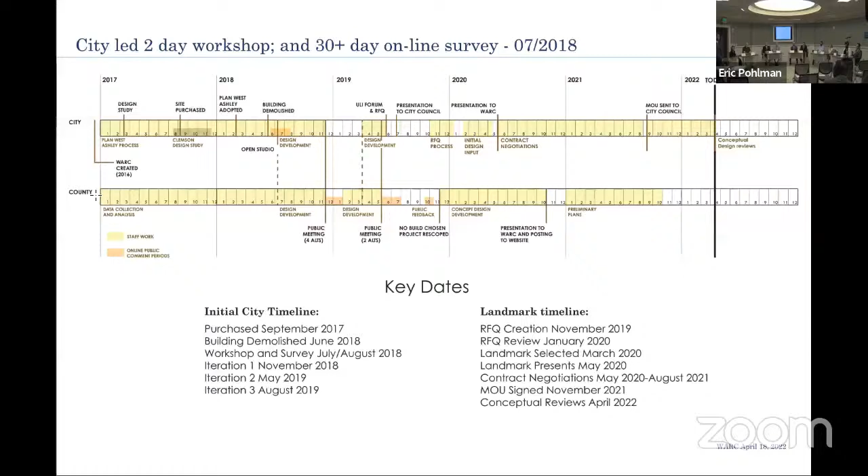As Councilman Shade said, we've been working on this since 2018. This is a timeline I keep of all the efforts we've put into this site—it's getting pretty tiny on the screen now. It's been going on since 2017 when we purchased it, and a lot of what we've been doing is also working with the county on the Sumar Street or Sam Rittenberg Old Town intersection. That was a solid year to year and a half of our work.

Shortly after the city demolished the property, about two months later, we did a very robust online and in-person public information campaign, getting ideas from the general public about what should happen at this location. We also had a two-day workshop where our urban design department sat down with anyone who walked in and drew whatever they thought should go on the site. We had quite a large amount of different design iterations on this parcel.

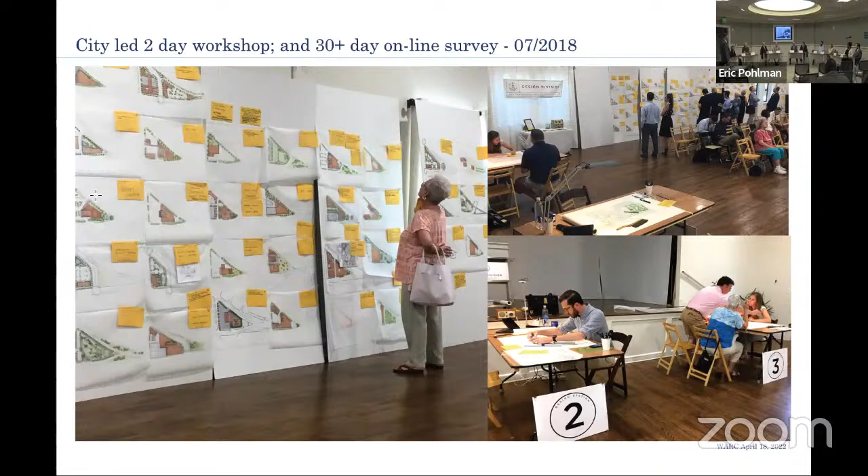In terms of the online survey, we had about 927 respondents over 31 days, 733 of them residents of West Ashley. For the most part, what they wanted was to be able to walk, bike, and take transit in the area—that was the majority of people, at 72% saying that.

They also wanted to see increased landscaping, better landscaping and beautification elements in this area. One of the most important items to them was that the intersection should be improved to allow all modes to travel through there, especially vehicles, to continue traveling through in a very safe and convenient manner.

When we asked what should go there, 61% of respondents said a passive park, 50% said small scale retail, and 49% said restaurant.

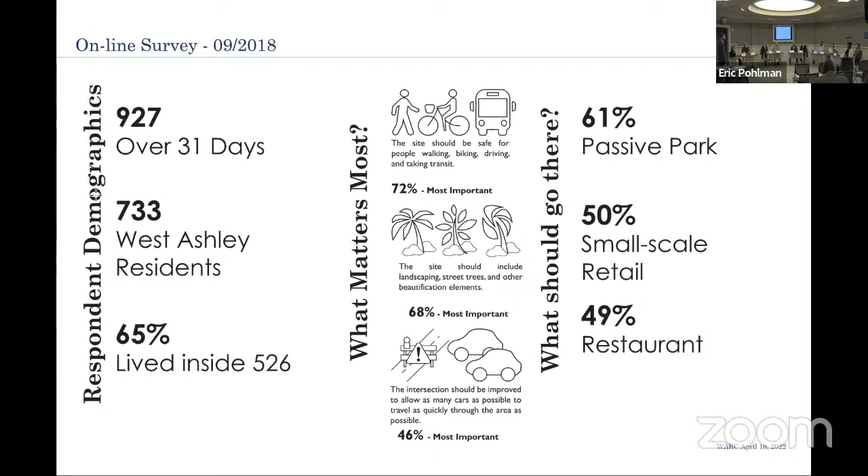We had a lovely fill-in-the-blank question: what is your big idea? A lot of people's big ideas were public green spaces, retail, traffic and transportation improvements, mixed use traditional neighborhood, make it look like the workshop, put green space for families out at this site, make sure it has civic or cultural uses. There was a big push by a group to have a wooden dance floor for dance events or other musical venues for Spoleto. Not very many people said residential, and a few people said it should just be aesthetically pleasing and useful.

So the recurring phrases and words we got from those surveys were: it needs to be safe, beautiful, family friendly, have gardens, parks, green spaces, and be able to host events.

With all that information, the city distilled it down into a conceptual program of having a passive park, small scale retail, restaurant, commercial, and civic cultural space. We worked out some general square footages we thought would be good on site—about 18%, or 18,000 square feet of built space, and 10,000 square feet of open green space.

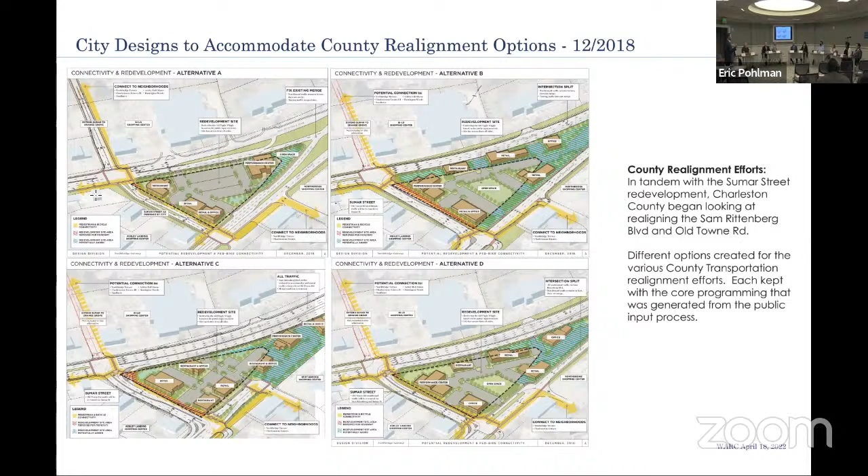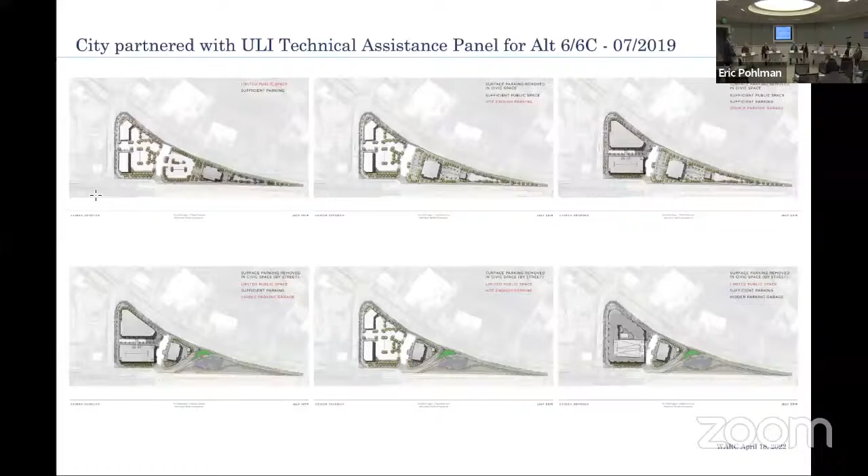With that, we entered in with the county as they were going through their realignment efforts, to show how the program could continually be adapted to what would happen at the intersection. The county started out with, I think, 6 or 7 options, which came down to 4, then to 2. The county opted, instead of trying to realign the roadway, to shift focus to making the intersection improved and safer for all in its current built way—I'll talk about that a few slides later.

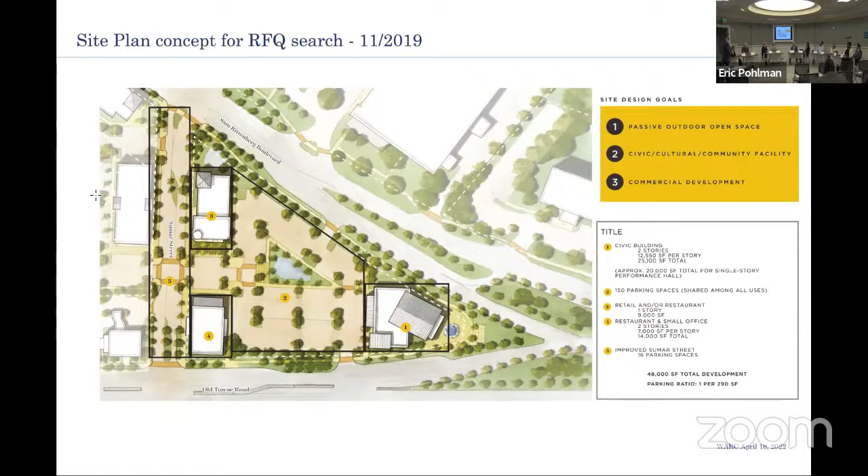After the county opted to go with the no-build for the realignment, the city released an RFQ for the commercial sector to come in and do a partnership with us. This was our imagined site plan for the area, to tease out the commercial sector for what could go here. It shows exactly the program we had wanted: passive park, civic cultural space, and small scale retail and offices, I believe.

And then after the RFQ, that's when Landmark and Liollio came in. They were our development partner that came through the RFQ process. I'm pretty sure they were excited, given the diagram they first submitted to us, by the fact that this area is surrounded by residential and has good, solid commercial uses around it already. So those are two elements they wanted for their private sector development.

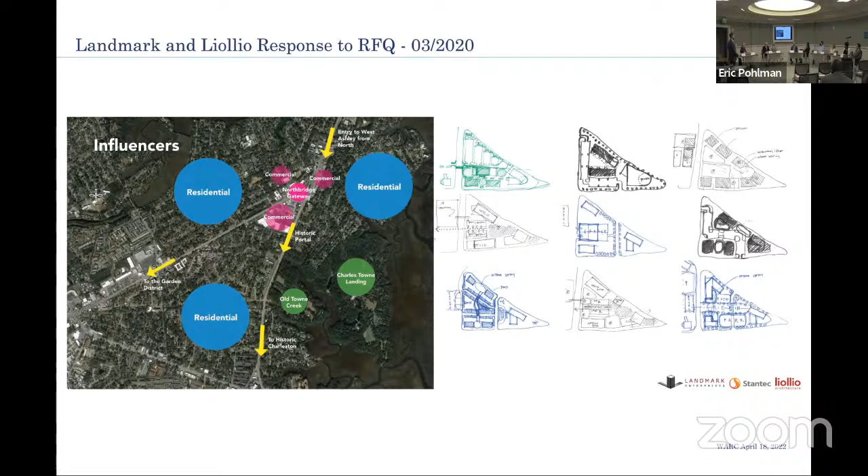In addition to that, there's Charles Towne Landing and the Old Towne Creek County park that's going to be coming in for public investment in the area. They went through and did some design sketches to see what they could fit on the site, and this is what they came back with.

Their proposal was actually to increase past what we thought could go there. They believe we can fit about 60,000 square feet of different use items: 20,000 for the civic function, which would be both the auditorium and offices for the city; 30,000 square feet of office; and 10,000 square feet of retail and restaurant. This was presented to the West Ashley Commission in May of 2020.

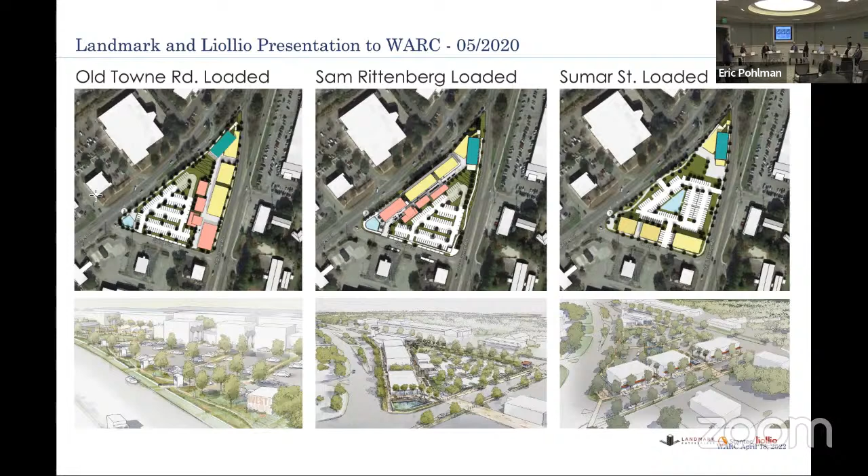We went through several discussions about where the built environment should go on the site, and throughout the hour and a half discussion, we kept coming back to Sam Rittenberg as the preferred option. There was no formal vote taken, but since this was the option most appealing to the commissioners, we felt this is the one our development partner should go with.

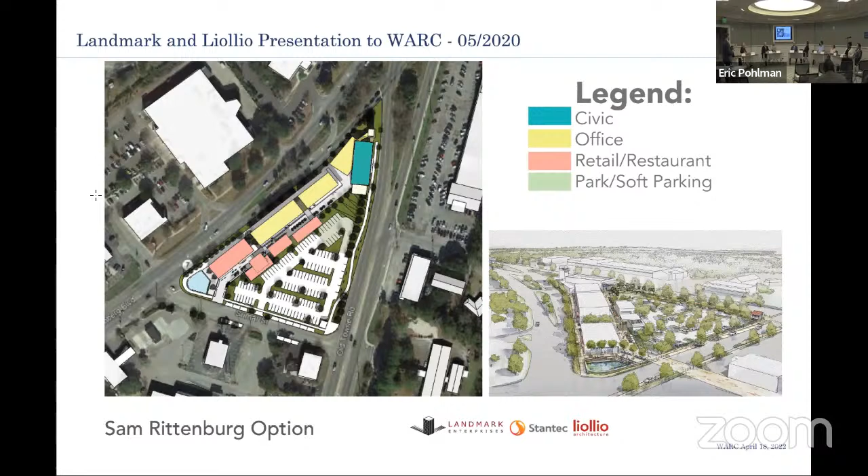Then in August 2020, shortly after that, the county re-released its plan for the Sumar intersection, Old Town Road, Sam Rittenberg area. This time, instead of realigning roads, they're focusing on improving what's already there and making it much more bike and pedestrian friendly, along with doing a lot more traffic calming through plantings along the road and installing some street lights that are needed right now.

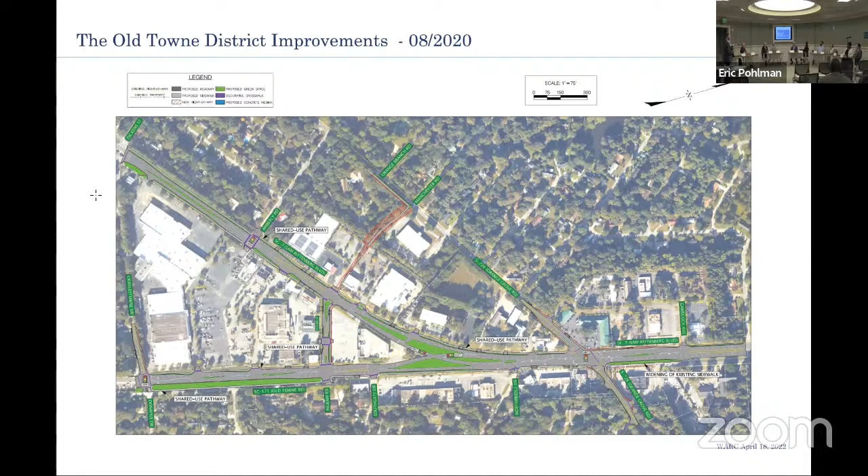In terms of that, I got this update this morning from the county. They are currently working on a preliminary plan set, which means it'll be designed out to about 30% completion. It's anticipated to advertise in late '23, early '24 for construction. They're designing it so it can be split into two phases, but we're hoping we'll be able to secure funding to build it all out at once.

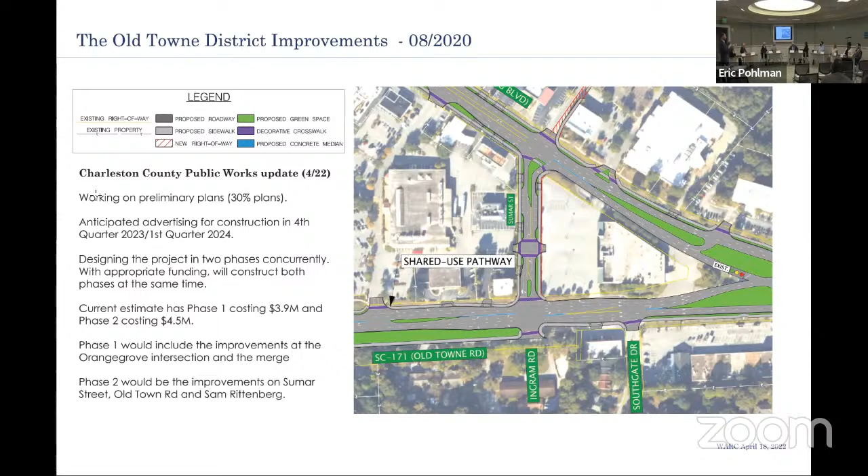If it is split into those two phases, right now County Public Works is anticipating Orange Grove and the actual scissor merge of Sam Rittenberg and Old Town will be the first elements redesigned and rebuilt. Phase two would be Old Town Road, Sam Rittenberg, and Sumar Street, further down towards Charlestown Estates Drive.

So this was the RFQ square footage that was submitted to us. What happened was, you'll notice it says March of 2020 on there, so we were very optimistic at the beginning of March for what could occur here.

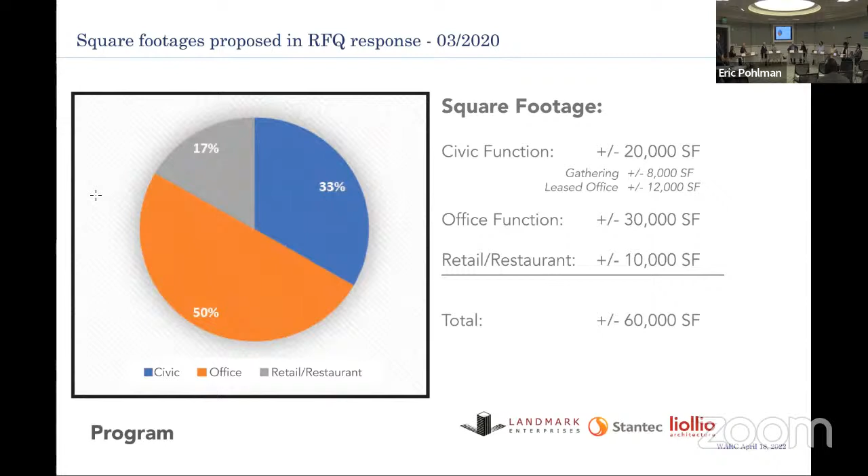We've had to go back through with Landmark, and we retooled the amount of private sector space that'll be coming in. They shifted some around from office to more retail and restaurant, and they did end up taking about 10,000 square feet off of the private sector investment.

The city investment has remained steady at 12,000 square feet for what we're calling civic space. That's going to be a flexible auditorium, so we can host meetings like this and city council in it, plus various conference rooms, professionally furnished, that we don't have available to the public right now. Then city offices at about 8,000 square feet.

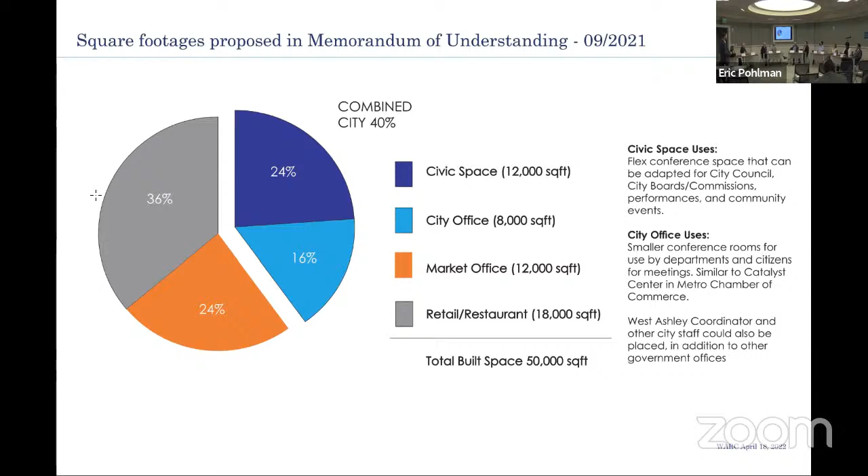And with that, I'm going to turn this over to...

This is our Landmark partner.

Okay, I'd like to start by thanking everybody for the time tonight and for this opportunity. This is not something we have taken lightly. This is a project we understand is very important to the community, very important to the city, and it has been a long time coming. Great overview by Eric on that. We've definitely put the time in, and I think you'll see tonight what we've been able to do with that time.

It really is an exciting thing. What we have learned about this project is, from the opportunity, is what we want to do is create something that's an amenity for the community. That's the important thing here, is create gathering space where there's something for each and every one. And we can create restaurants and offices that you can live and play at this location.

In this small area of West Ashley, it's a gathering place where the community comes together and has outdoor events, barbecue cook-offs, car shows, you name it. We can have an event here with live music, movie nights for the family with an ice cream vendor, or a brick oven pizza restaurant to gather in.

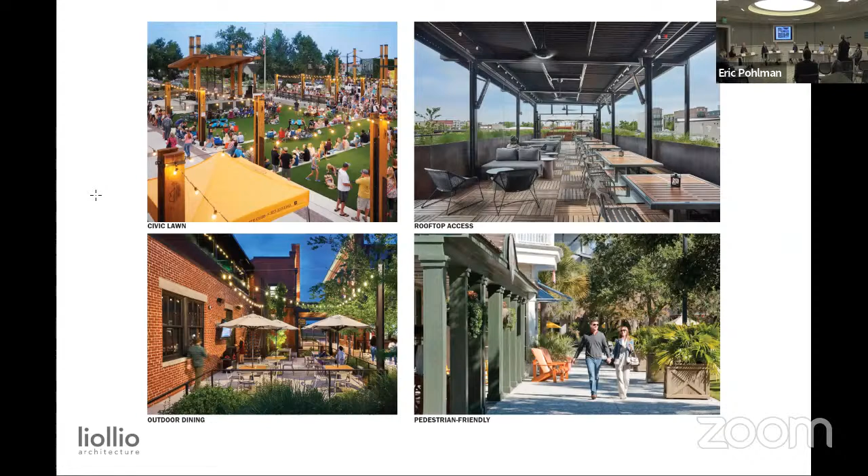So the site plan is evolving, as you saw what Eric was presenting and where we're at right now. Is there a pointer on this? The red button. I'm afraid to touch anything. And of course, you can't see the red button.

That's all right. If you can imagine for a moment, the Old Town to your right, Sam Rittenberg to your left. And what we felt was most important was that the civic community function be at the apex, much like the civic design centers the charrette process produced.

So building one, for instance, that you see is the gathering place, the assembly area, where hopefully in the next year and a half or so, we might be meeting there to give you all an update on everything. Building two is the office building, ground level, being more towards civic conference spaces, small meeting areas, the upper two floors being devoted to the city staff.

Building three, restaurants, as you can see, flanking the interior. I'm sorry, it's hard for me to talk without moving my hands. Building three is flanking the internal pedestrian area right here, which is kind of an effort to evoke that emotion of the European, the Italian, the Greek, small street areas where people can gather.

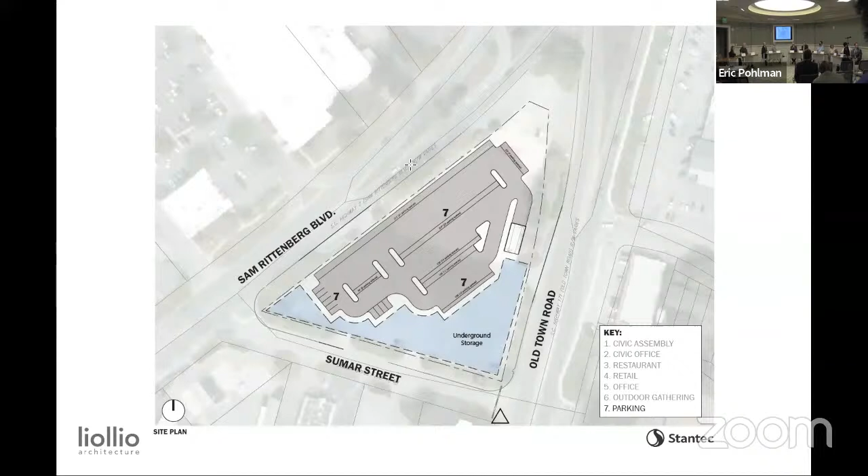Jumping back one slide, the other piece tied into the ULI and the parking we've been looking at is, number one, we're looking to utilize ride share, have a drop off, a loading zone for pedestrians looking to get a ride home via Uber or Lyft, whatever it might be. And the other piece is looking at the potential site of having an additional bus stop here along Sam Rittenberg.

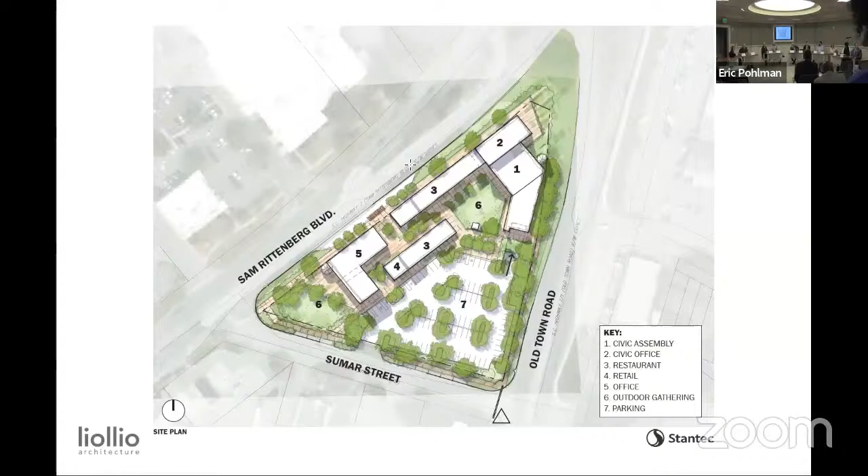So when we translate all of this, we started with the volumetric study of how the spaces would begin to look when they're taken vertically out. But this begins to give you a sense that what we're doing is basically bookending the development with three-story structure on one side, three-story structure on this side, and two-story and one-story structures mingled in between.

And then we began to play with form. One of the key aspects we're also looking at is how do we provide this wonderful green space for people to congregate. And if you've been on the site, you know how noisy Old Town and Sam Rittenberg are collectively. So we figured that if we could utilize the building form to an extent to help us as an acoustical barrier, and we will have other barriers to help us along that way as well, it would begin to give us a defined space of an outside plaza area.

We'll also note that there are connectors that pierce the openings, for instance, for the bus stop that Tom was just talking about. There is an entryway right there into the complex, so it makes it easy for those who may be riding the bus to access. There will be bicycle storage, considering what is happening right now with improved North Bridge as far as cycling is concerned. We'll be accommodating all of that as well.

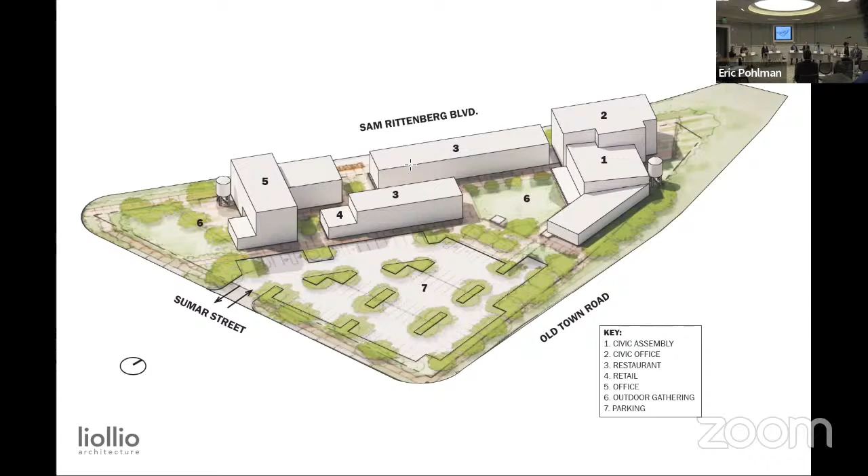This gives you a sense of the evolution from a form study. Above-grade stormwater retention is one designation of some of the sustainable issues being integrated. That's one thing the mayor specifically asked us to do: provide a building that not only responded, but also educated. So all of those items are evolving as we walk through this.

As mentioned earlier, we've got areas we started initially sketching, getting a better idea of these areas between buildings that connect back to Sam Rittenberg, not only using those as interstitial space between buildings, but how to properly program that to add to the overall ambience we're looking for here.

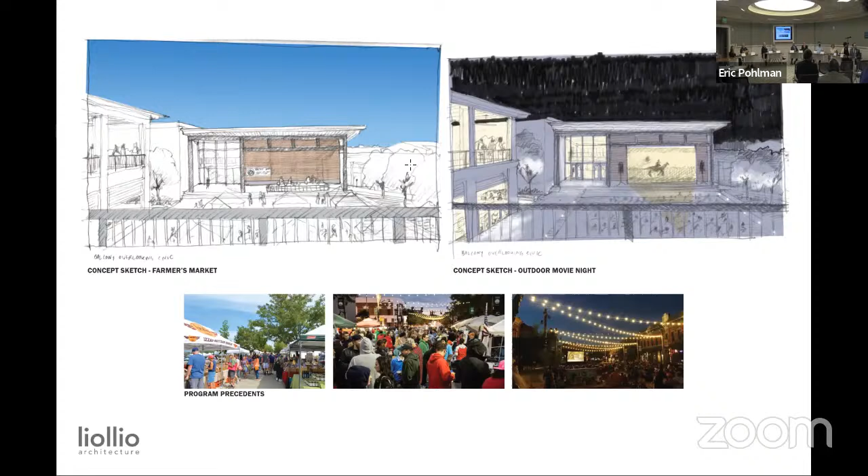And Jason is adamant that he's going to be the first one at the chili cook-off, right? Okay, I've heard a lot about chili cook-offs.

So then we translated this into a bit more as far as form studies are concerned. One comment that came out, which you won't necessarily see tonight because we're still working on it, was some type of vertical structure that might be incorporated within the context of the site. We're talking about the ability to communicate both vertically and horizontally, people seeing and talking to each other. We're talking about fun spaces, gathering places that could provide a farmer's market location on a Saturday or an art show on a Saturday. All of these things began to evolve.

That took us to the next evolution. Now, as we get into the next stage, one of the things we really strive for, three main components as far as architecture from our standpoint, are context, culture, and collaboration. The collaboration—seeing Ann walk in right now—meeting with the neighborhood was an important component in helping us understand what was going on with everything.

But truthfully, from a contextual standpoint, there is really nothing to draw upon architecturally, the language that's there. So as you'll see in this series of slides, we figured the architectural side would be simple—trying to provide some language for future developments, with elements that give a sense of minimal materiality: masonry, steel, wood accents, etc. That's what we drew upon from a contextual standpoint.

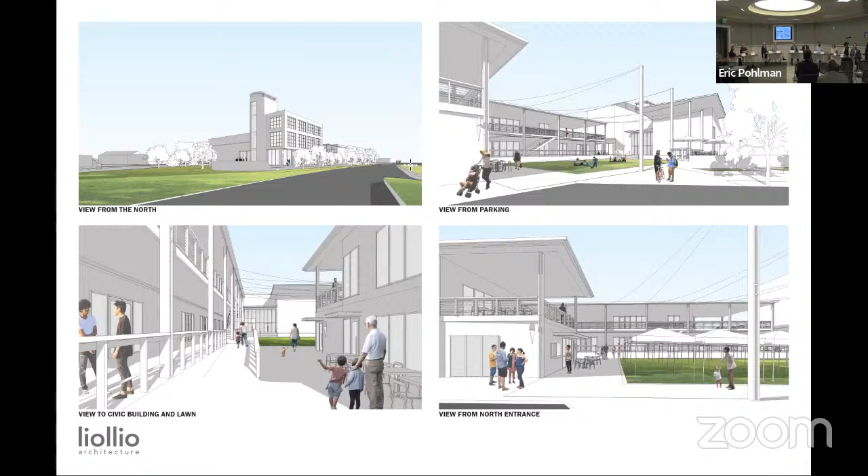And then from a cultural standpoint, Tom did all kinds of studies looking for something culturally significant to the site. There really isn't, other than the fact that I wheelbarrowed bricks there when the original Piggly Wiggly was built—we didn't figure that was significant enough. So we are beginning to look at architecture in this format, and there are some issues we think are important.

First of all, the three-story section at the end provides a cantilever, a boldness, an innovative aspect that we feel represents the ongoing evolution of West Ashley. We can reflect that in the architecture. We extracted volume out of the corner and created balconies there. What a wonderful place, if you're in any of the city offices or whatever, to have the opportunity to step out and look a bit more on a different scale as far as West Ashley is concerned.

The aspect of division with respect to the transparency of the entire site, where you can see from this end all the way to the other end. We're working right now, not showing it, because we actually ran out of real estate to an extent. But we're looking at a vertical piece that would be coming up here that you might see as you're crossing North Ashley River Bridge. It's a point that's in evolution at this point in time.

And of course, the ongoing demonstration of sustainable issues such as the stormwater towers. There are nine oaks along North Bridge that we're trying to retain as we go through this. We're talking to arborists right now and seeing what we can possibly do with that. But again, you can see it's just a minimal expression as far as the structure, but we feel that with some boldness and expression of the architecture, it might begin to define what we're talking about.

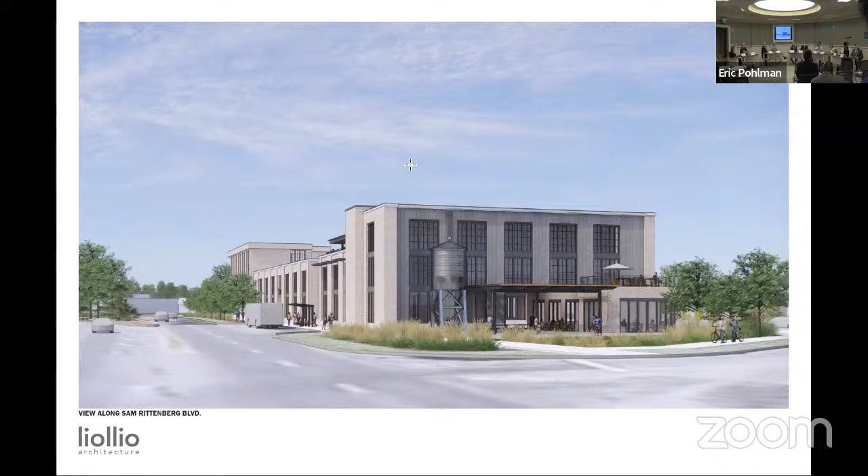The really neat aspect of a coffee shop that extends here to the base with outdoor dining on top. You can get a sense of some of the outdoor dining being suggested on the rooftops. And this is the beginning of the sense of what that pedestrian mall area would be, with outdoor dining. There's going to be additional landscape along this wall here that begins to provide a sense of lighting the seating out there. But at this point in time, we're being very patient and careful how we begin to express that.

We're also looking at use of balconies here for dining on the second floor. We're looking at the possibility of creating little Juliet balconies off the second level, so somebody, Kenneth, is standing up there yelling down at me to order a beer from the place below. Just the idea of communication and encouraging those aspects.

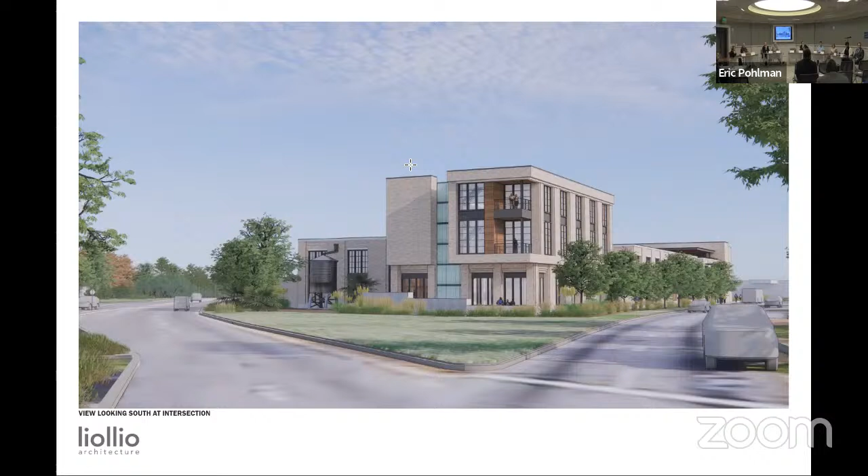But we also know that we're going to probably go through a variety of moderations as far as looking at the design as we go forward. But that's really what drove the exterior material.

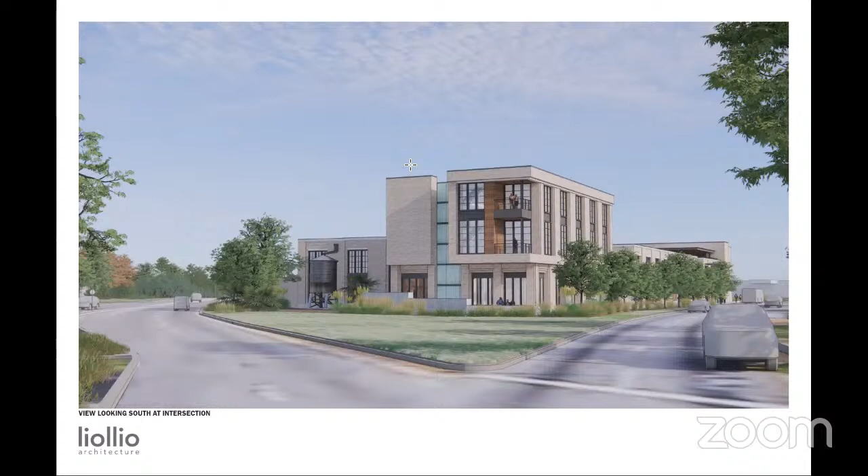Well, and I really appreciate the creativity of subterranean parking that way, that's great. I mean, our friends in Northbridge Terrace told us they did not want to look at hulking structures outside their neighborhood. And I think I'll wait to hear from Ann and others, but I think you've captured that, keeping the commercial side on the Sam Rittenberg side, which I really appreciate.

I think there's going to have to be a lot of discussion down the line with the attorneys, we're talking about land leases. You're an old developer, I'd love to hear what Justin's thoughts are, but how do we do long-term land leases, spec buildings? I mean, you're going to pre-lease, and I'd love to get into all those weeds at some point. Maybe not the time of day, but those are things we need to talk about.

Yeah, we'll get to that point. But we'll build on what you just said about Northbridge, because my neighborhood association president is here tonight, and it was a very conscious decision to put that scale of building on the Sam Rittenberg side and not the Northbridge Old Town Road side, just for the exact reasons Councilman Moody you just pointed out. That's very critical for the community to understand the sensitivity that we're experiencing and exercising with this project.

Justin. I appreciate the developer and the architect's time on this, and it seems to reflect a lot of the feedback. I mean, as you think about the gateway to West Ashley,

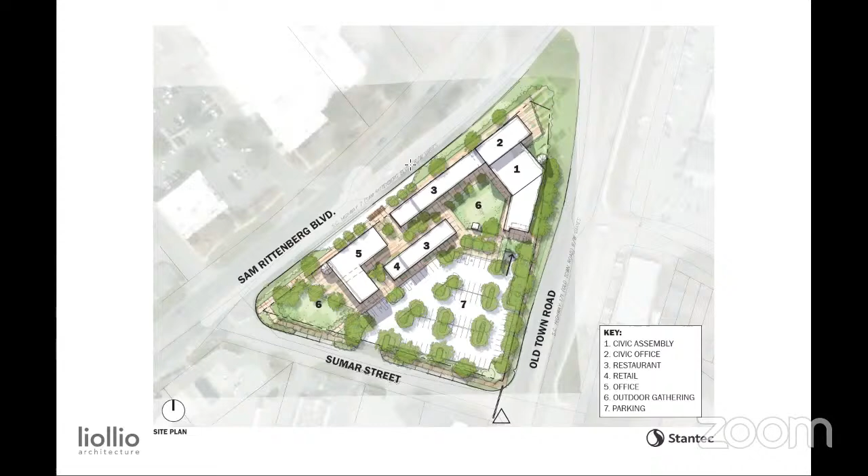So, correct, our next steps are to go to city council on April 26th, and then we are aiming for May 16th for the design review board. After that, we'll go through the technical review committee to work through the city code aspects. The whole time between all this, we're working on the development agreement, because we want to make sure that when we come to the end of our MOU, we're in a good space, both in terms of the private sector and public sector, to continue this partnership.

If you don't mind, somebody said something about dead pigs, and I've got another one down 61 that the city was kind enough to help us with on the Greenbelt project. I just thought I'd update the crowd that the PSD has finalized the footprint and design for their new fire station. HLA and our friends Barry Whalen are working on the site design, expecting preliminary design work in the next couple months, permitting in 12 to 14 months. They're hoping for construction by later next summer, probably fall. This is Old Parsons Road, near Church Creek. This is Dead Pig 2, which may have been deader longer than that.

This is something really very critical that Councilman Moody is bringing to our attention, in the city's partnership with the public service district and the county on getting that accomplished. One hiccup is that the county public works folks felt that ripping up the concrete well in advance would be detrimental to Church Creek, having it ripped up and sitting there until they wanted to build on it. So that was one change that happened. It's still the concrete jungle, but hopefully that'll change.